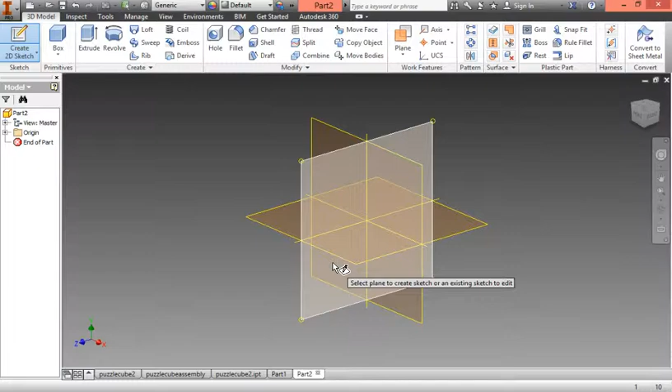Okay, so in Inventor, I have a new part file open. I'm going to create a 2D sketch, and I'm going to go ahead and draw a couple lines here and finish it off. Okay, this is an open profile. What that means is it's not a closed off shape, that my points aren't all connecting to each other. My lines aren't all connecting to each other.

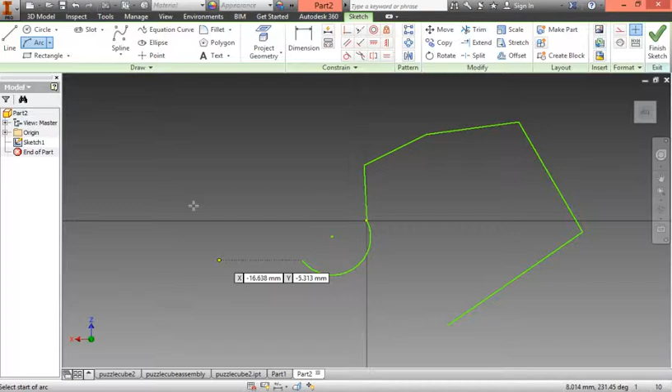So once again, it doesn't have to be straight lines. I could do some arcs in here and really make it look like any shape I want. But if it's not connecting from here to there, then it is not a closed profile. It is an open profile. But if I go ahead and connect them, we now have a closed profile.

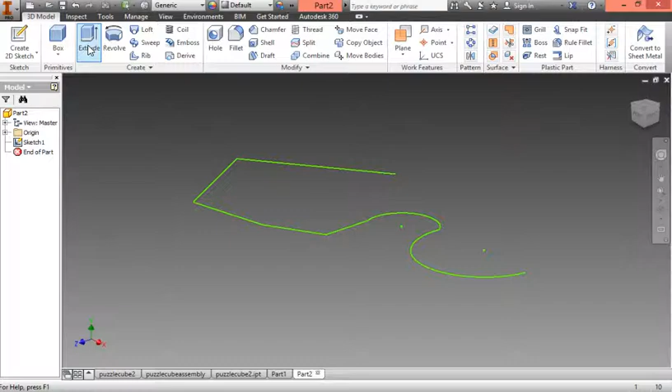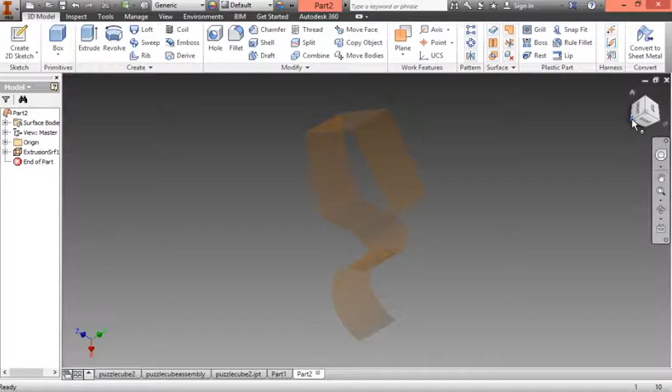So what I want to do is go back one step where I don't have that line, finish my sketch, and then try to extrude it. Okay, this right here, it doesn't work. When I click the checkbox, I don't actually have an extrusion here. I have this fake line 3D object that has a whole bunch of planes almost. This is not a real object. If you look at it from the top, you can't even see anything. So we need to have a closed profile before we can actually extrude.

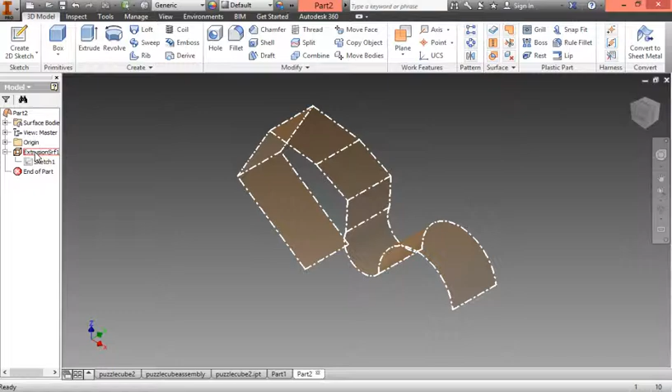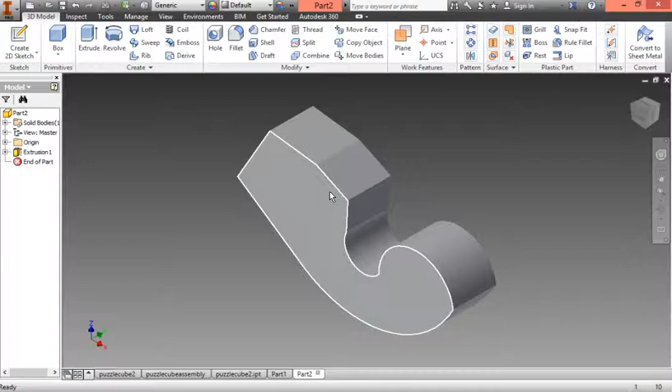So I'm going to go back into that sketch that I just made, add that arc back in that I had originally, then finish my sketch, and delete out that extrusion that I made. Oops, sorry about that. I'm going to make the extrusion again, this time with that closed face. Do you see how it's like a solid object now? This is because it's a closed profile. You need to make it a closed profile before you can extrude it.

So once again, the difference between a closed profile and an open profile is when you're in the sketch, a closed profile means that all the lines are touching each other, making one solid shape. If I deleted this out without them touching each other, that is an open profile. So we're answering number 12. Can a 2D sketch be an open profile before extruding? The answer is no.

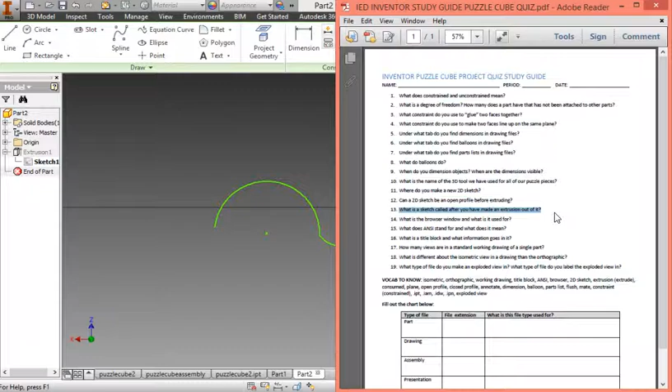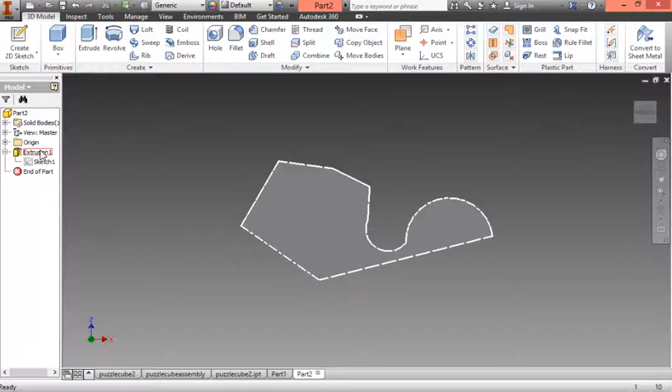For number 13, what is a sketch called after you have made an extrusion out of it? Let's try that right now. I'm just going to do a straight line this time, but I've connected it, finished my sketch. I have my extrusion here. So after a sketch has something that made it 3D, and it doesn't necessarily have to be an extrusion, but the question asks for extrusion, the sketch is called consumed, which means that it's being used. So this sketch is being used by the extrusion.

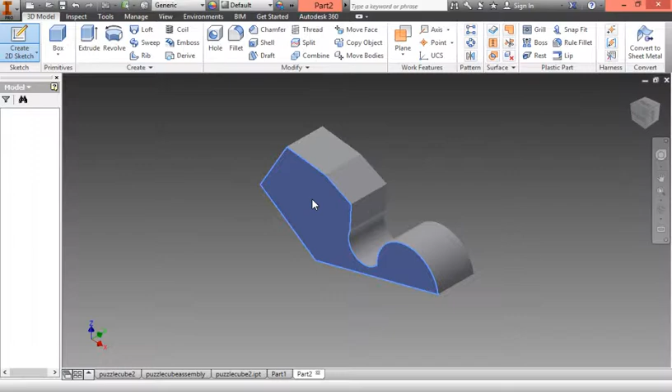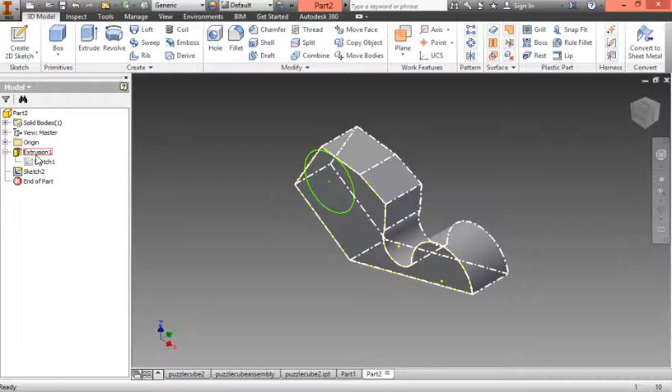If I make a new sketch, I'm going to just draw a circle and finish sketch. On the browser window over here on the left hand side, I'm going to make it a little bit bigger so you guys can see. This sketch is underneath extrusion, so it's consumed. This sketch has not been made 3D at all, so it's unconsumed. That's another vocab word you need to know. Any 2D sketch that's been made 3D is consumed, and any 2D sketch that has not been made 3D is unconsumed.

Consumed, unconsumed. You can also look at these little plus signs, and when you collapse everything, then I don't see the sketch for extrusion. That means that it's consumed. Okay.

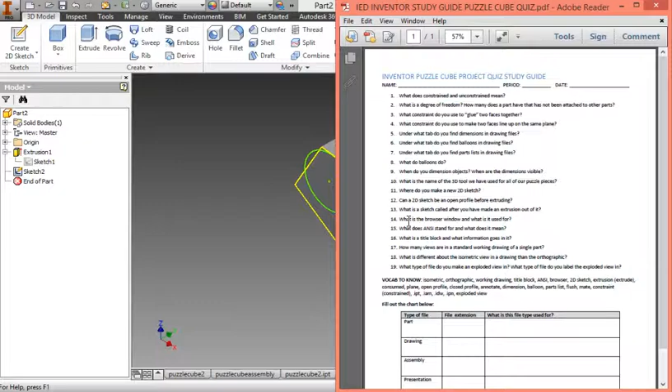So what is it called? Or what is a sketch called after you have made an extrusion out of it? Consumed. The sketch has been consumed. All right. Number 14, what is the browser window and what is it used for?

The browser window is this area over here where we have the part, we have our origin, and we have all of our planes, our X, Y, and Z axes. We have all the different 3D parts, the 2D sketches, and all of our information about our part. This is all in the browser window. And this is in a part file.

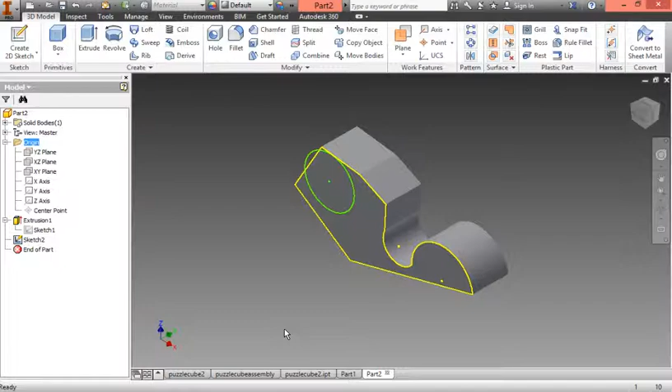If I go over to a drawing file, I have a browser window again, and it has once again my information about my sheet. On my drawing sheet, I have what kind of text is there. I have my different views that are there. So the browser window is really used to break down what you have inside your Inventor file, whether it's a part file, an assembly file, or a drawing file.

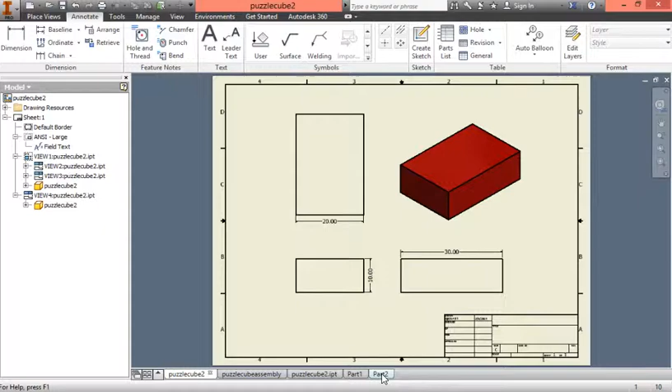The browser is always over here, and it's used to kind of break down everything that you see in your file. And if you highlight your mouse over any of the objects, you'll see how they turn red in this area. So if I highlight my mouse over Puzzle Cube 2, that view, it actually makes it red over here. So it's a good way to see what all is going on in your project. Especially in part files, it's extremely helpful.

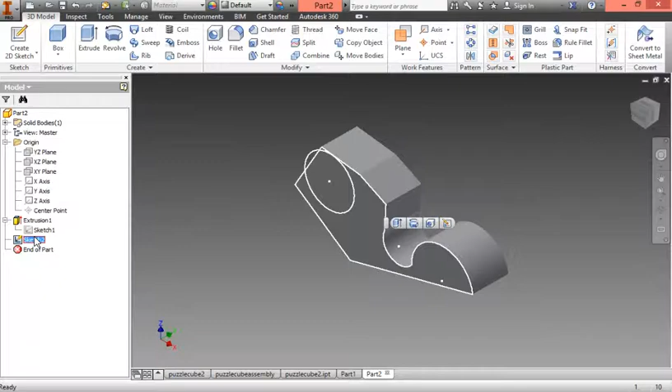If I wanted to, for example, get rid of just that sketch and I don't know where it's coming from, I can hover my mouse over it until I see that it's been highlighted. And when I see that it's been highlighted, I can right click on it there, if my right click will work, and delete it out. Okay. I can also double click on a part, an extrusion, a 3D feature, or a 2D feature, and edit it.

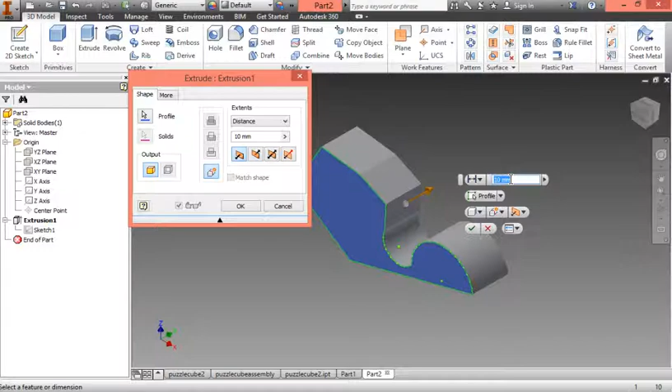So if I wanted this extrusion to be larger or smaller, I could double click on it, and it gives me that window that I originally had for the extrusion. And now I could change it to 20 millimeters or whatever I want it to be. And I could edit the part. Same thing with the sketch. If I went in here and I dragged this out and make sure that it's consumed so they're touching each other. See how it changes my sketch, okay?

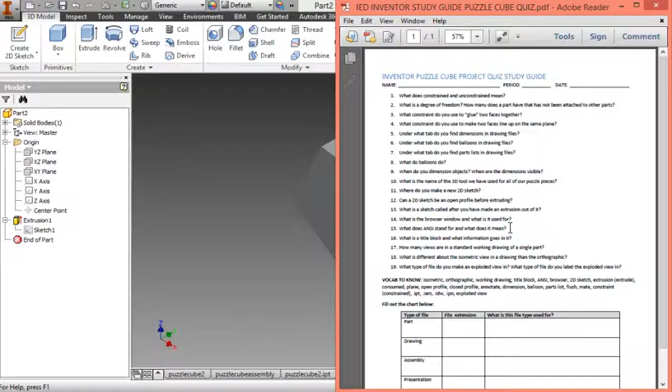So you can use the browser to double click on the 3D or 2D part and edit whatever specific instructions you gave the computer the first time. All right, what does ANSI stand for and what does it mean? ANSI we see when we go to a new file, actually it's several times in here, it says ANSI here. If we go down to the drawing files, we have an ANSI drawing file.

But basically ANSI means the American National Standards Institute. And ANSI is an organization that comes up with the standards that engineers use when they're making these files. And the reason that there are standards is because you have all these different engineering firms all over the world, and they're exchanging these files to work with each other to maybe design a part that works with another product.

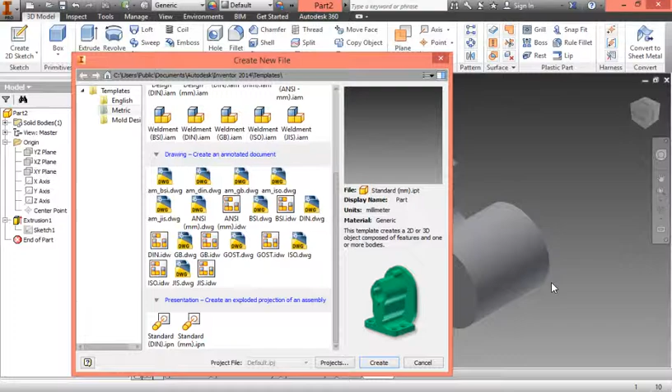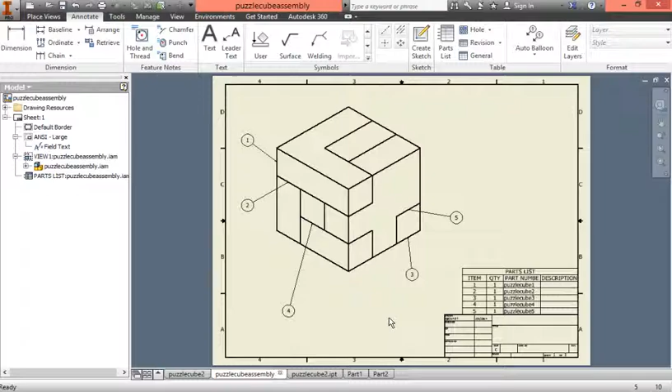And if they all have the same standards, if they're all using the same file type, the same dimensions, the same text styles, then there's no confusion on what's expected from each other, and no confusion on how to read the files. So there's a lot of information, especially in the drawing files, with standards for how you make the balloons, how you do the parts list, how you dimension it. And those are all developed by ANSI, the American National Standards Institute. So that answers what does ANSI stand for and what does it mean.